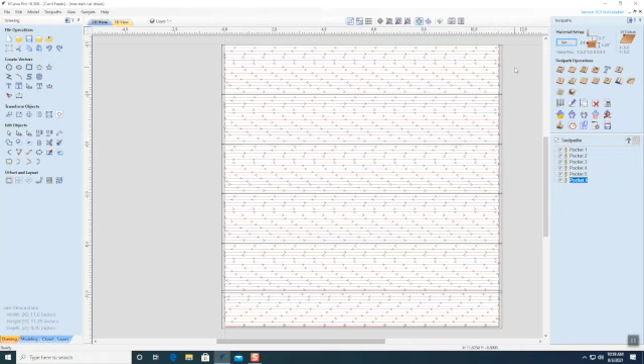The other thing was up at the top, it was not clearing. As you're looking at my screen and your screen, up at the top, it was not cutting away the material. So I need to move that one square up.

And when I do that, I can fix it in a couple different ways. I can move them all up and enlarge. But what I do here is I figure out, wait a minute, this is a little more work than I want to do. Let's change a couple things.

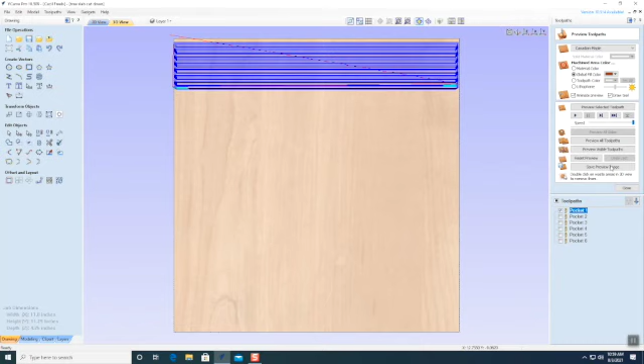Right here what I'm doing is changing the depth of cut. I was cutting at 1.5 inches, and now I have about 3/4 of an inch more clearance than I thought. So I'm going to drop that down to 3/4 of an inch, taking away 3/4 of an inch on this pass, and that gets me the clearance I need to get below the carriage.

So 3/4 of an inch will get me there, and then I'll do a cleanup pass at the end, which you'll see that I'll add. So I drop that one down, and I go to the next one and do the same thing.

Now I'm going to move it up. Unfortunately, my microphone didn't work when I was doing this in the VCarve program, so I'll simply ad-lib as we go along so you can see what I'm doing.

See how I raised it? I should have also enlarged it instead of just moving the squares up, and I realized that pretty quick, because otherwise I have to go all the way to the bottom, and if you look at the bottom there isn't overlap.

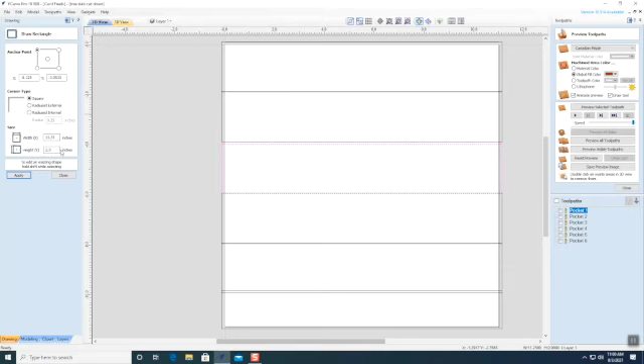But here we go. I realized, wait a minute, why don't I just enlarge the square? So I'll change this height to 2.2 inches, and that will expand the square so I can move it up now, and it covers that gap. See it? So I'll simply move that up with the up arrows, and there we go. Now I've filled in that gap, and extended it up at the top so I can clip that off.

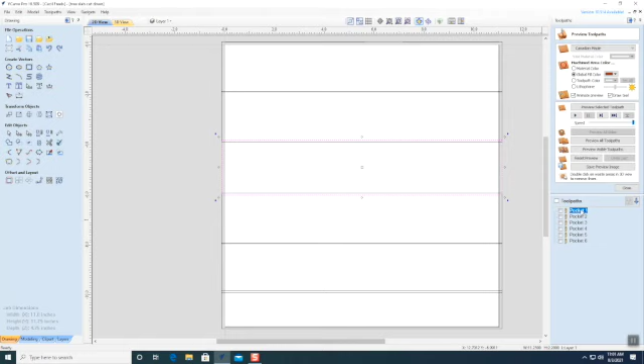I've done number 1, so let's look at number 2. You see it's also 1.5. So I'm going to change that, and go all the way down through there to do the next 6. I'm going to speed that process up.

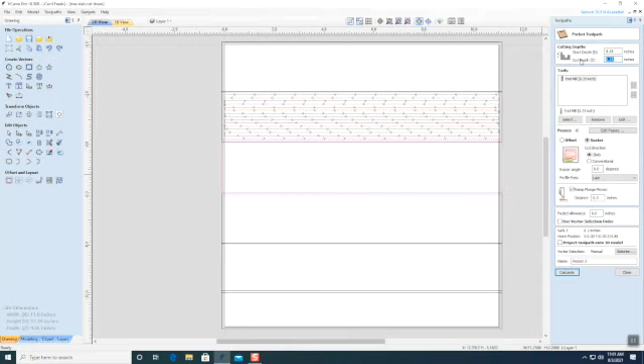Now I repeat the process in high speed. I change it to a cutting total depth of 0.75. As you can see, if I go down 0.5 to start, then all I have to cut off is 0.25. Now I'm going to add a square.

What I did here is I'm simply checking my dimensions. Rather than memorize them or write them down, I do so many projects some days that I just go back and refresh my memory. So I'm going to make a box or rectangle centered up in the upper left corner. That's going to be my start point, and I'm going to make it oversized so it fits over this entire project.

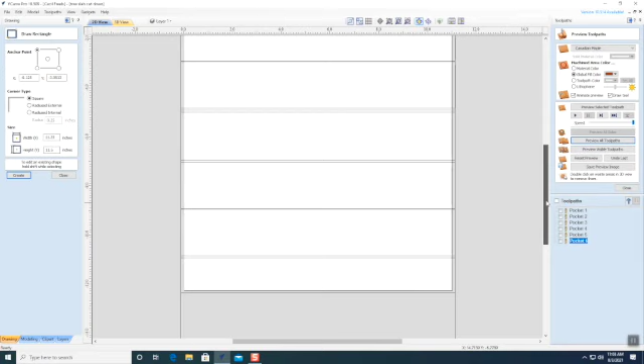I just extended it by 0.25 beyond the parameters. To do it again, I think I would go another 1/4 inch, so it would give a full pass on the outside. And there I just made the mistake of touching it. I'm centering the square now, and you can go into your alignment tools and do that in a couple clicks so you can see the box.

So I'm going to put a pocket in there. I'm going to go down to a depth of 0.125. I'm going to start at 0 - oh, start at 0.75 because I've already milled off the top. And then go down another 0.125.

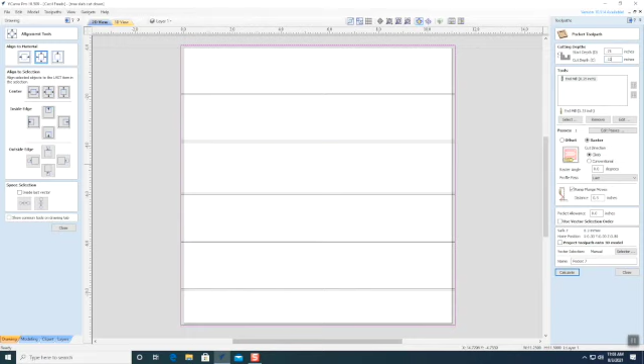And that kind of smooths all that together, ties it all in. That's basically it. I'm going to call it pocket 7. As you can see, it's all the way down there. It cuts a small amount out, and it works pretty good. So that's what I did.

And you see it cleans it up. If you run that one first, obviously it would be wonderful, but it's not going to chew through all that material. The machine I have, a CNC Shark, won't cut - well, it will cut that, but I have to slow it down.

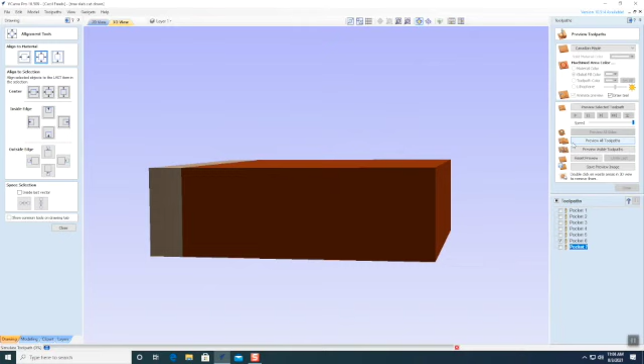So it's a trade-off. Preview all of them when you're done. You can see the first one, the second one, third one, fourth one, fifth one, and if you now watch the checkbox over there, it shows you which one it's on per pass.

And that's it, my finished project. Smoothing that down to get a flat level plane.

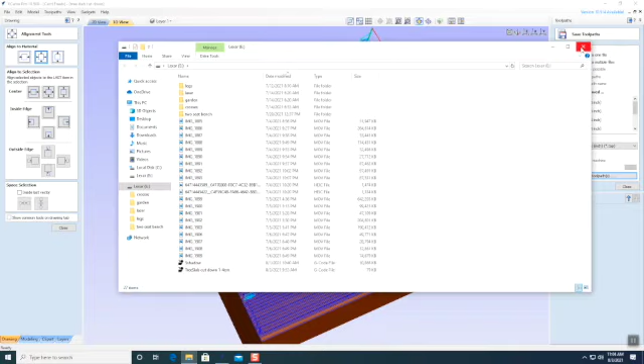The last step, of course, is saving these files. I save them off to a flash drive, which is, I don't know, it's E in this case, E drive, which is my flash drive, and then take it out and plug it into my machine and my CNC, and away it goes.

So this was kind of a different project. How do I machine down something that won't fit under my carriage? This is one technique to do it. I'm sure there's others out there, but this is the first way I thought about doing it, and it works.

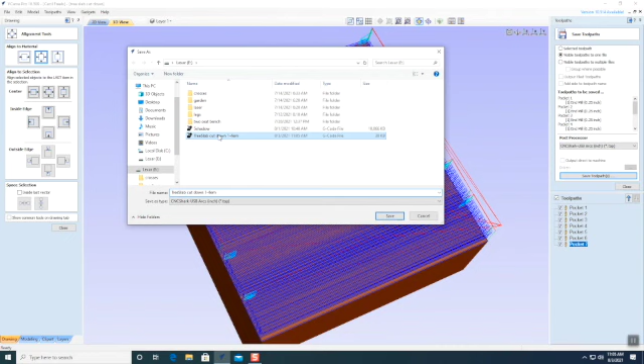It was kind of a fun project, easy to do, and I saved a piece of wood that otherwise I'd been fighting with. Yes, you can cut it with a chainsaw, yes you can do it a lot of different ways, but this is a nice, safe way to do it. Easy mounting, and you've got the CNC.